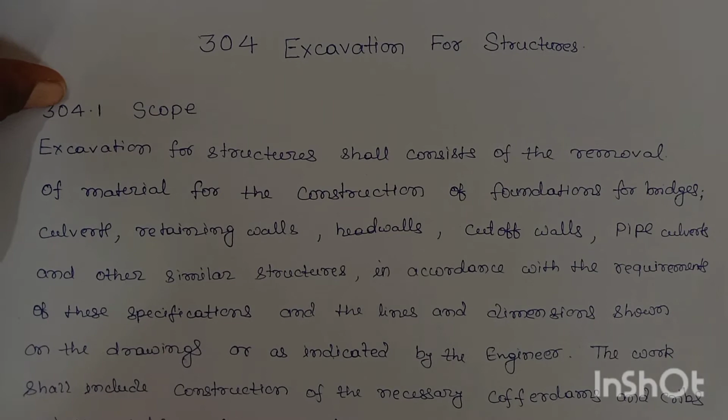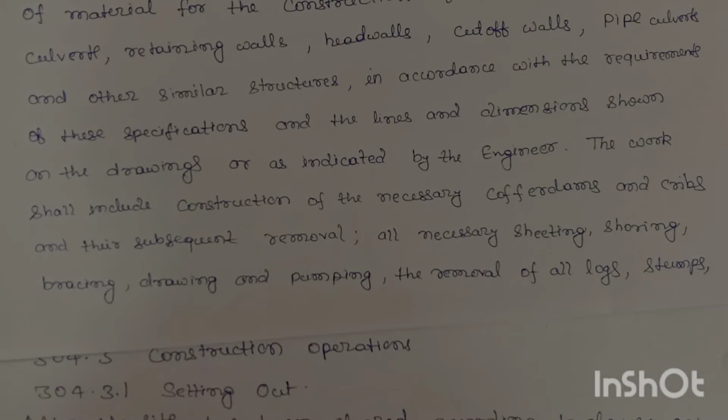The work shall include construction of the necessary cofferdams and cribs and the subsequent removal, all necessary sheeting, shoring, bracing, draining and pumping, the removal of all logs, stumps, grubs and other deleterious matters and obstructions necessary for placing the foundation, trimming bottom of excavation, backfilling and clearing up the site and the disposal of all surplus materials.

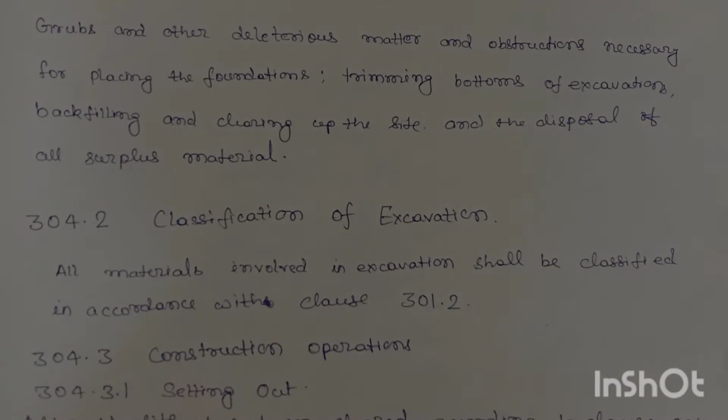304.2 Classification of excavation. All materials involved in excavation shall be classified in accordance with Clause 301.2.

304.3 Construction Operation. 304.3.1 Setting out.

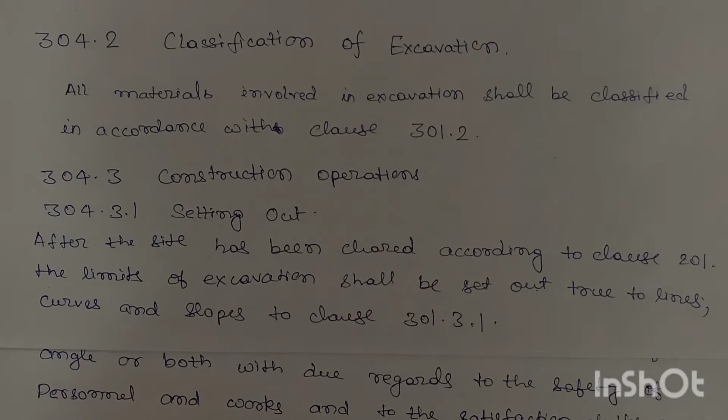After the site has been cleared according to Clause 201, that is clearing and grubbing, the limits of excavation shall be set out true to lines, curves and slopes according to Clause 301.3.1.

304.3.2 Excavation. Excavation shall be taken to the width of the lowest step of the footing, including additional width as required for construction operation. The sides shall be left plumb where the nature of soil allows it; where the nature of soil or the depth of the trench and season of the year do not permit vertical sides,

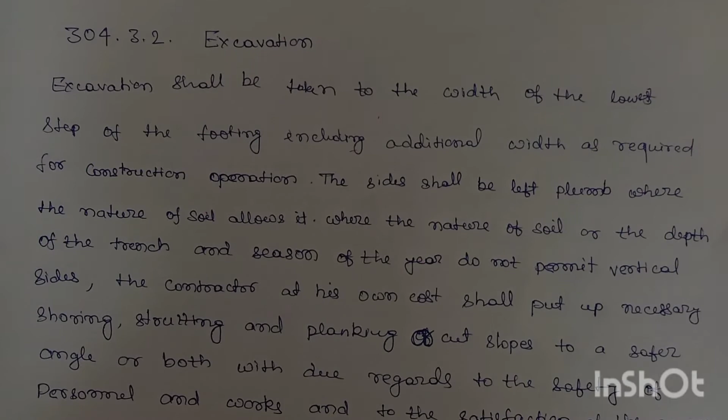the contractor at his own cost shall put up necessary shoring, strutting and planking, or cut slopes to safer angles, or both, with due regard to the safety of personnel and work and to the satisfaction of the engineer.

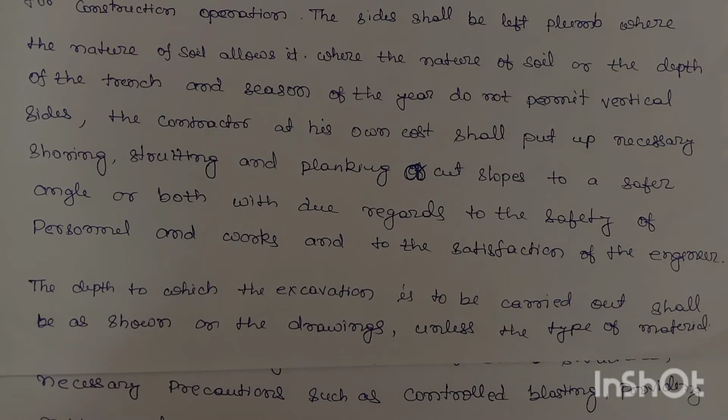The depth to which the excavation is to be carried out shall be as shown on the drawing unless the type of material encountered is such as to necessitate changes, in which case the depth shall be as ordered by the engineer.

Propping shall be undertaken when any foundation or stressed zone from an adjoining structure is within a line of 1 vertical to 2 horizontal from the bottom of the excavation.

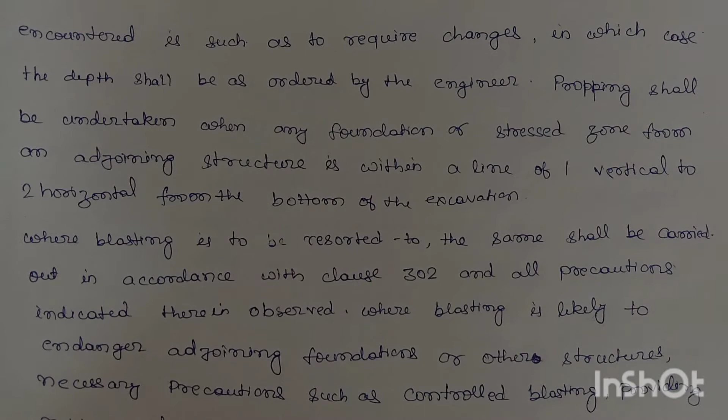Where blasting is to be resorted to, the same shall be carried out in accordance with Clause 302, and all precautions indicated therein observed. Where blasting is likely to endanger adjoining foundations or other structures, necessary precautions such as controlled blasting, providing rubber mat cover to prevent flying of debris, etc. shall be taken to prevent any damage.

304.3.3 Dewatering and protection. Normally, open foundations shall be laid dry where water is met with in excavation due to stream flow, seepage, springs, rain, or other reasons.

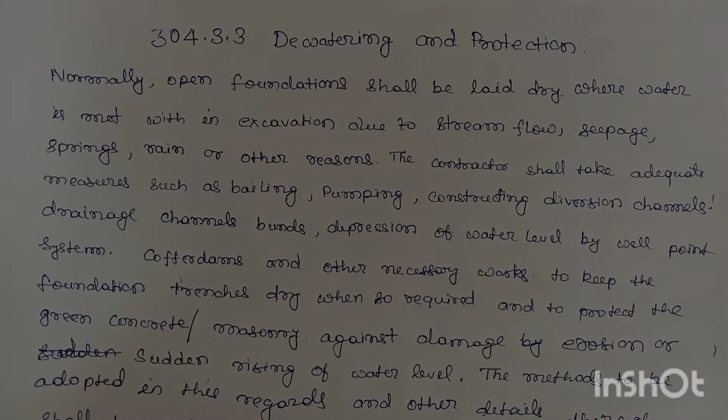The contractor shall take adequate measures such as bailing, pumping, constructing diversion channels, drainage channels, bunds, depression of water level by well point system, cofferdams, and other necessary works to keep the foundation trenches dry when so required and to protect the green concrete masonry from damage by erosion or sudden rising of water level.

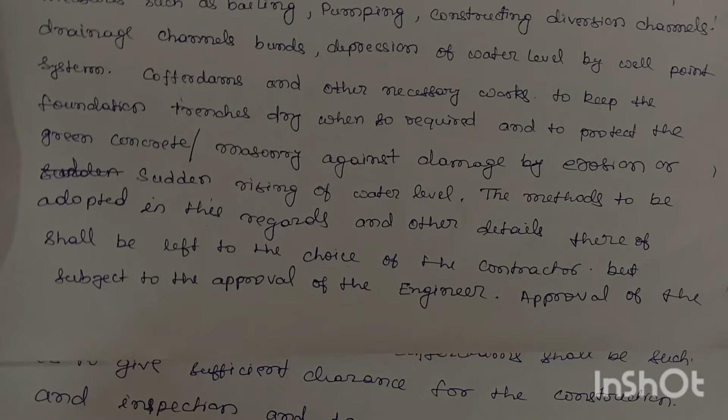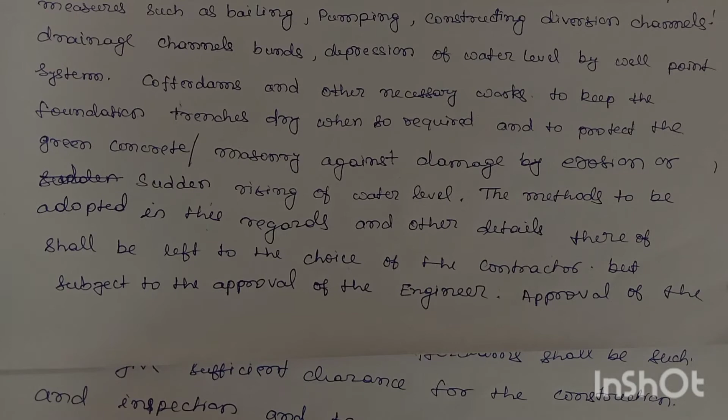The method to be adopted in these regards and other details thereof shall be left to the choice of the contractor, but subject to the approval of the engineer. Approval of the engineer shall however not relieve the contractor of the responsibility for the adequacy of the dewatering and protection arrangements for the quality and safety of the works.

Where cofferdams are required, these shall be carried to adequate depth and heights, be safely designed and constructed, and be made as watertight as is necessary for facilitating construction to be carried out inside them.

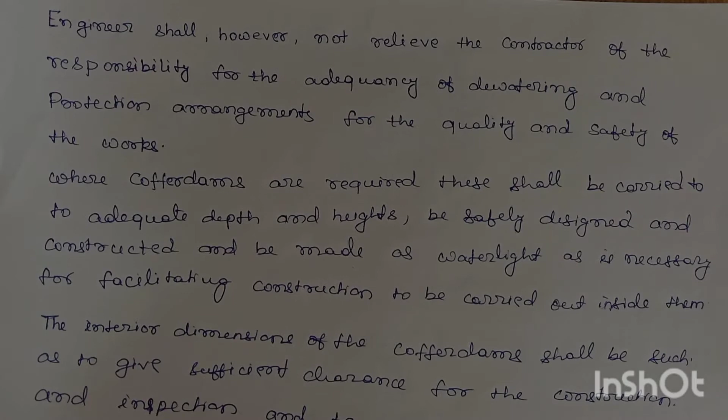The interior dimensions of the cofferdam shall be such as to give sufficient clearance for the construction and inspection and to permit installation of pumping equipment etc. inside the enclosed area.

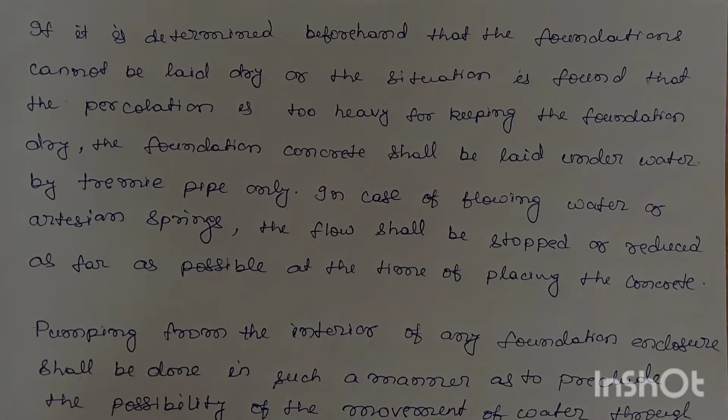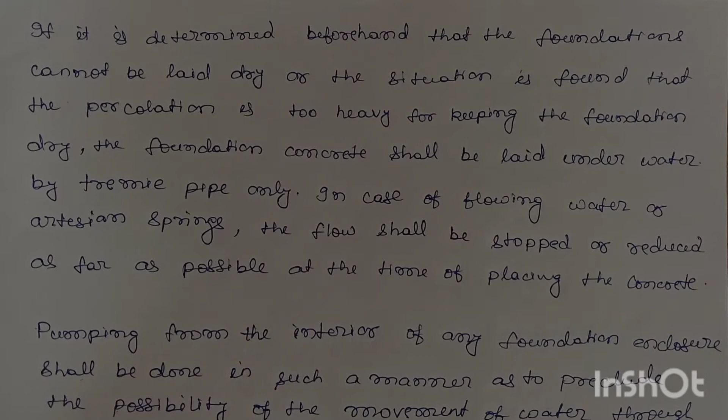It is determined beforehand that the foundations cannot be laid dry, or the situation is found that the percolation is too heavy for keeping the foundation dry. The foundation concrete shall be laid under water by tremie pipes only. In case of flowing water or artesian springs, the flow shall be stopped or reduced as far as possible at the time of placing the concrete.

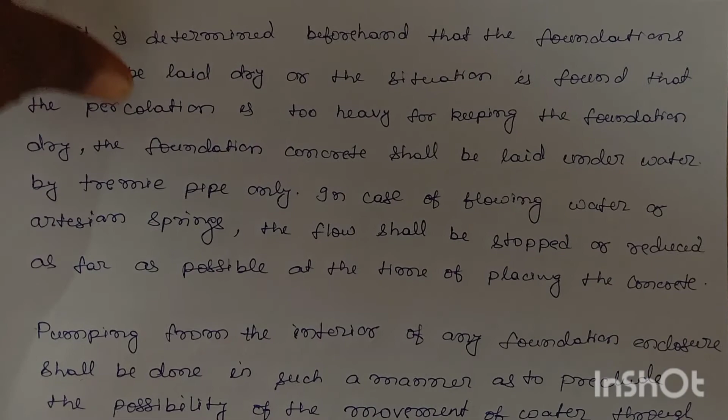Pumping from the interior of any foundation enclosure shall be done in such a manner as to preclude the possibility of the movement of water through any fresh concrete.

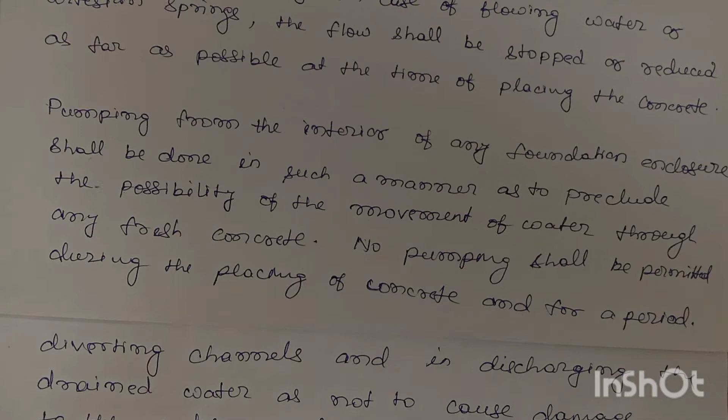No pumping shall be permitted during the placing of concrete and for a period of at least 24 hours thereafter, unless it is done from a suitable sump separated from the concrete work by a water-tight wall or other similar means.

At the discretion of the contractor, cement grouting or other approved methods may be used to prevent or reduce seepage and to protect the excavation area.

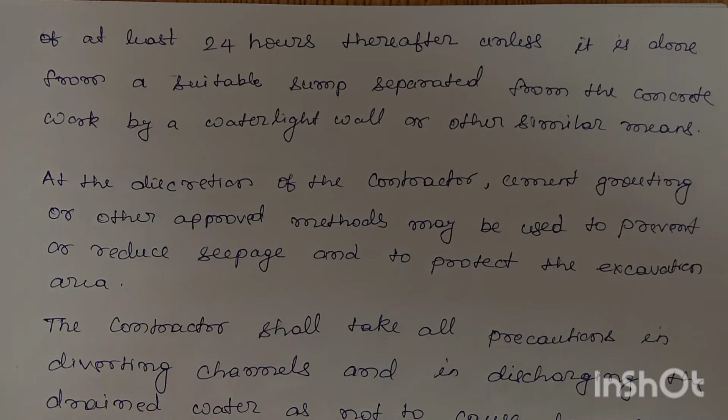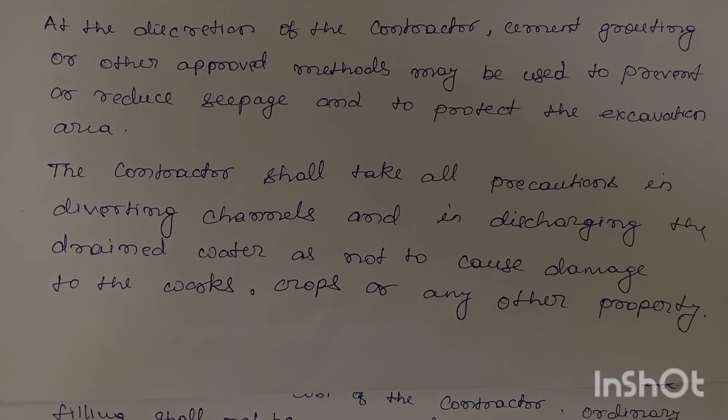The contractor shall take all precaution in diverting channels and in discharging the drained water so as not to cause damage to the works, crops or any other property.

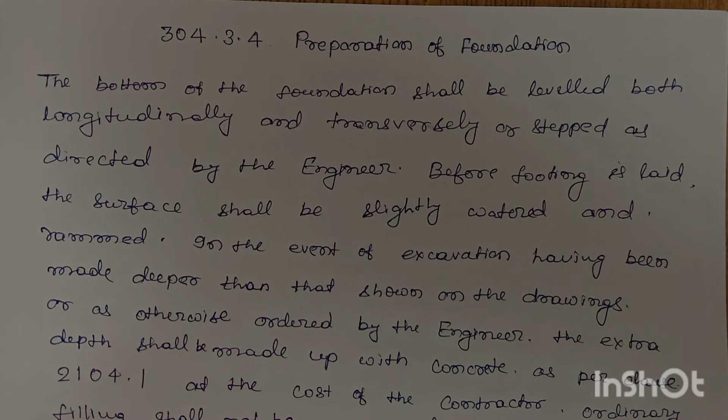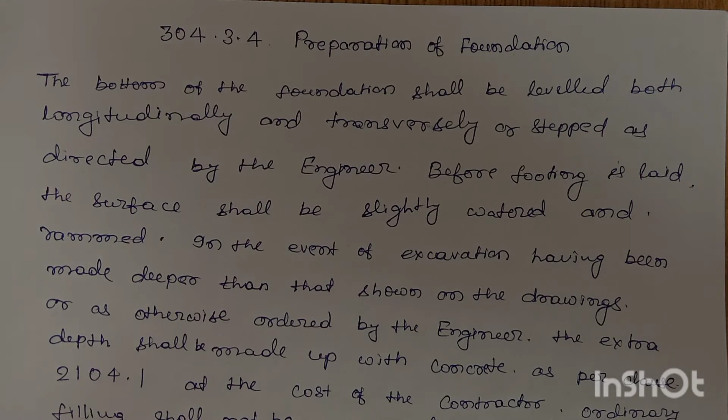Preparation of foundation. The bottom of the foundation shall be leveled both longitudinally and transversely or stepped as directed by the engineer. Before footing is laid, the surface shall be slightly watered and rammed, in the event of excavation having been made deeper than that shown on the drawing or as otherwise ordered by the engineer.

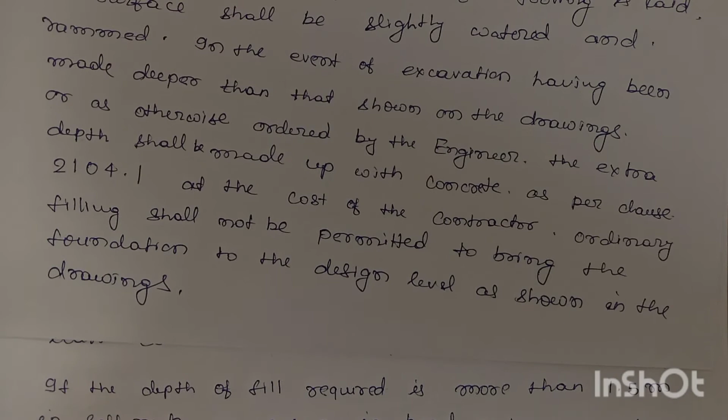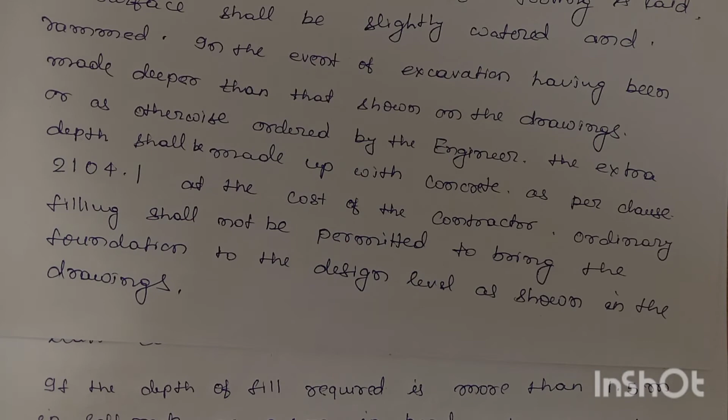The extra depth shall be made up with concrete as per clause 2104.1, at the cost of the contractor. Ordinary filling shall not be permitted to bring the foundation to the design level as shown in the drawings.

When rock or other hard strata is encountered, it shall be freed of all soft and loose material, cleared and cut to a firm surface, either level or stepped, as directed by the engineer. All seams shall be cleared and cut, filled with cement mortar or grout to the satisfaction of the engineer.

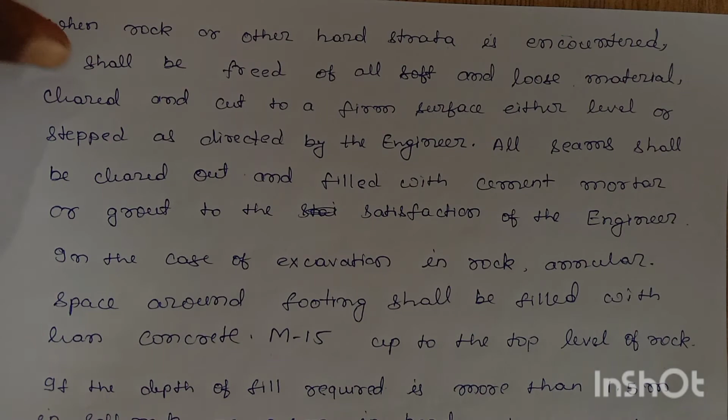In the case of excavation in rock, annular space around footing shall be filled with lean concrete M15 up to the top level of rock, if the depth of fill required is more than 1.5 meter in soft rock or 0.6 meter in hard rock above the foundation level.

The filling up to this level shall be done with M15 concrete, and the portion above shall be filled up by concrete or by boulder grouting with cement.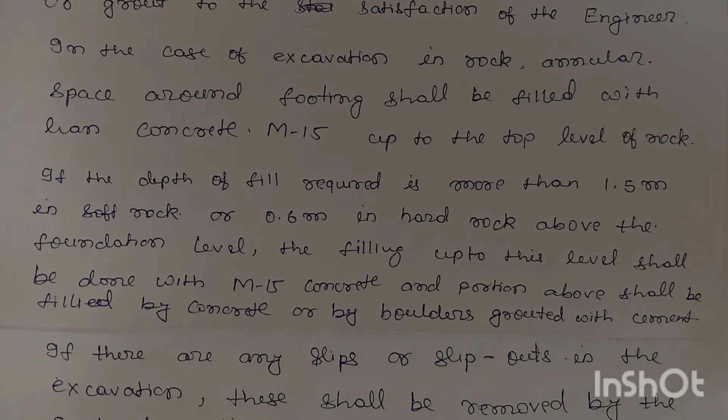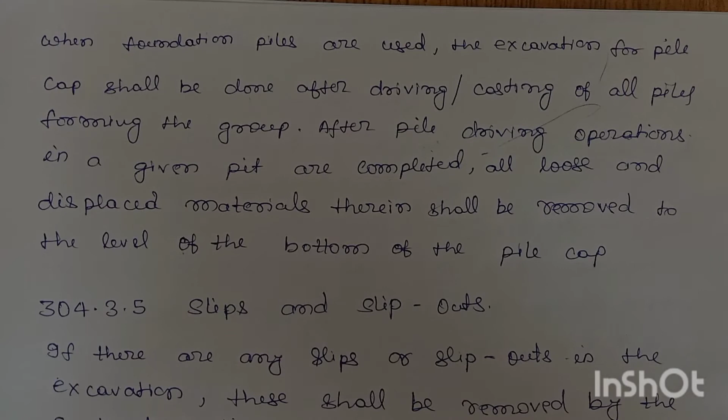When foundation piles are used, the excavation for pile caps shall be done after driving and casting of all piles forming the group. After pile driving operation in a given pit are completed, all loose and displaced material therein shall be removed to the levels of the bottom of the pile cap.

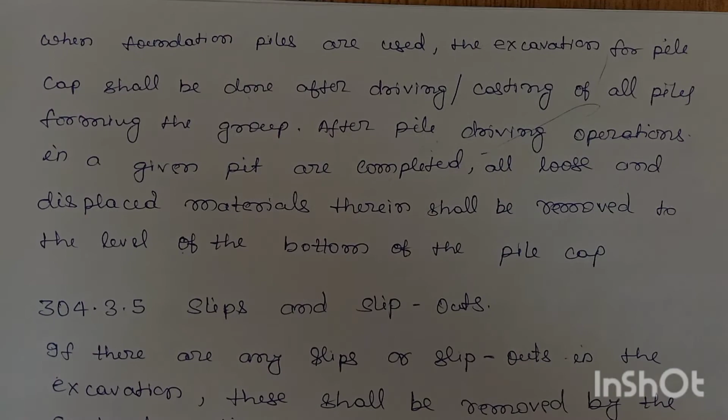304.3.5 Slips and slip outs. If there are any slips or slip outs in the excavation, these shall be removed by the contractor at his own cost.

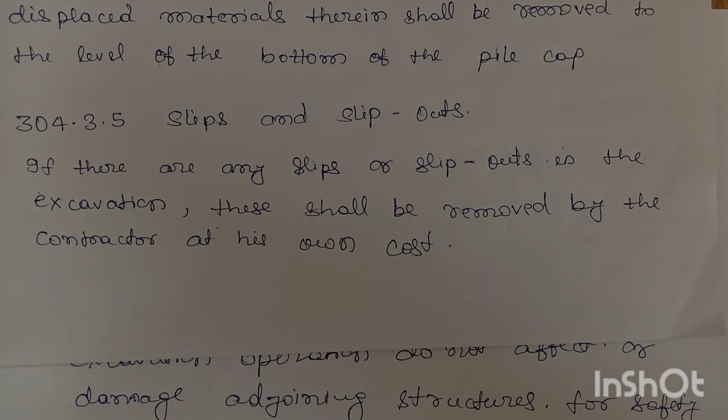304.3.6 Public safety. Near towns, villages and all frequented places, trenches and foundation pits shall be securely fenced, provided with a proper caution sign, and marked with red lights at night to avoid accidents.

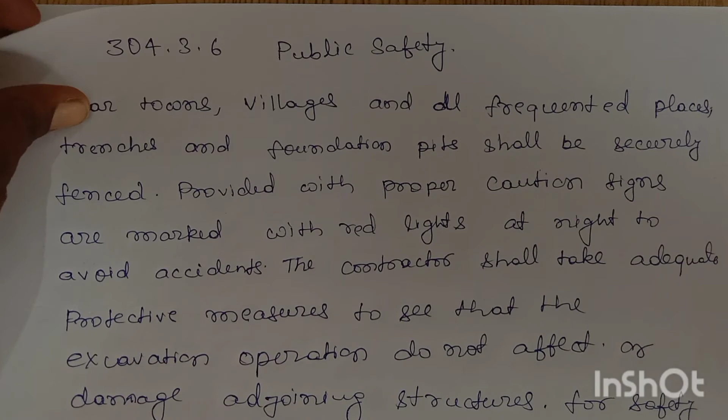The contractor shall take adequate protective measures to see that the excavation operation does not affect or damage adjoining structures. For safety precautions, guidelines may be taken from IS 3764.

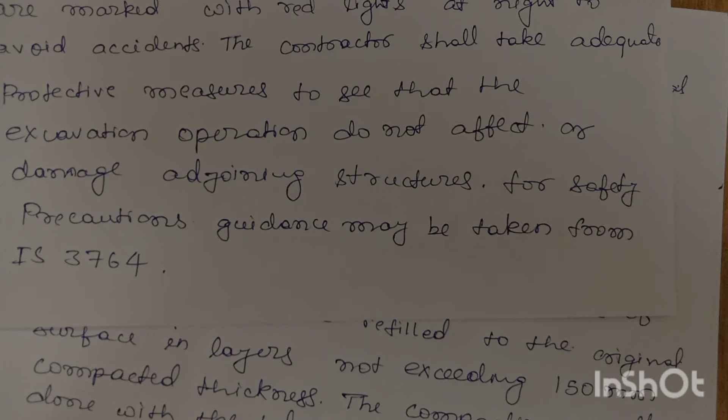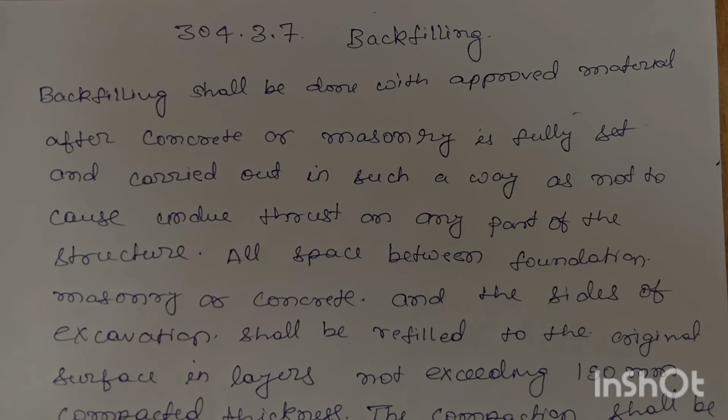304.3.7 Backfilling. Backfilling shall be done with approved material after concrete or masonry is fully set, and carried out in such a way as not to cause undue thrust on any parts of the structure. All spaces between foundation, masonry or concrete and the sides of excavation shall be refilled to the original surface in layers not exceeding 150 mm compacted thickness.

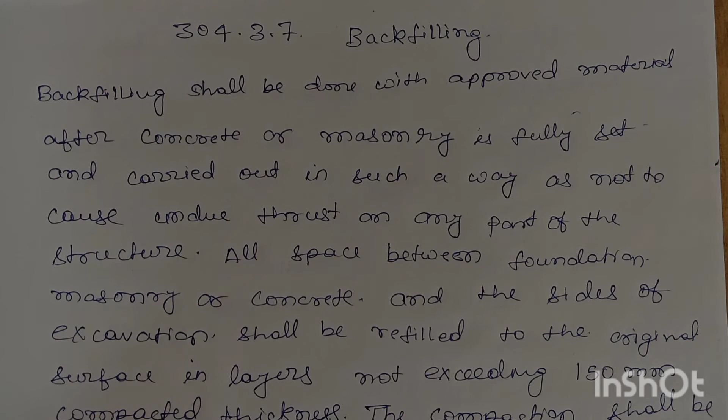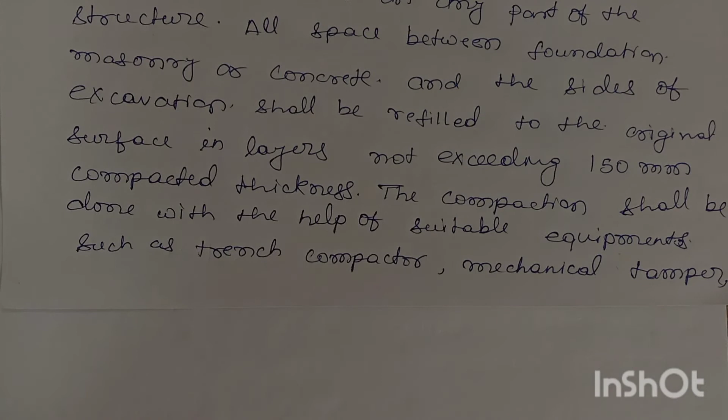The compaction shall be done with the help of suitable equipment such as trench compactor, mechanical tamper, rammer, plate vibrator, etc., after necessary watering, so as to achieve the maximum dry density.

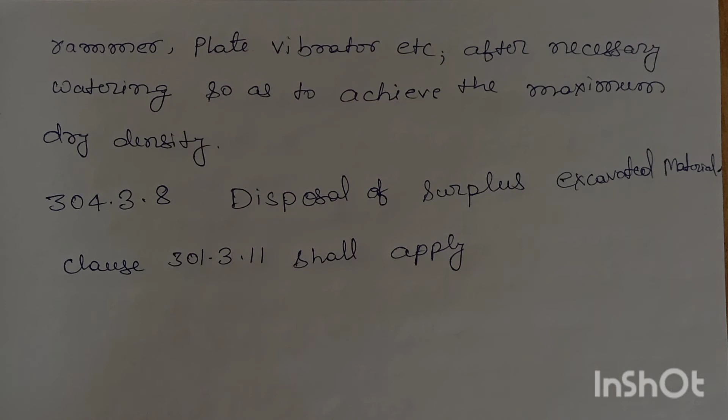304.3.8 Disposal of surplus excavated material. As per clause 301.3.11 shall apply.

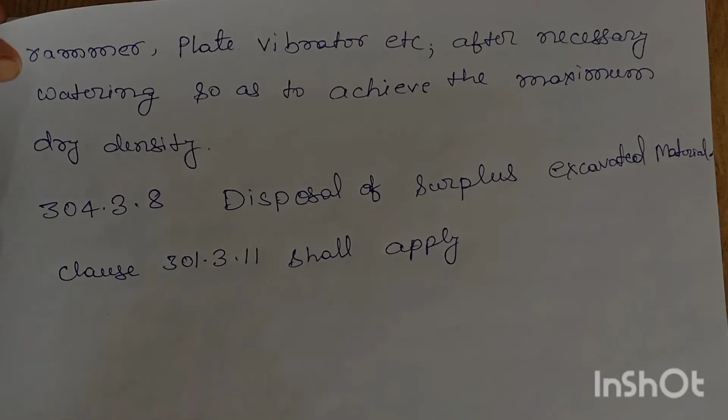304.4 Measurement for payments. Excavation for structure shall be measured in cubic meters for each class of material encountered, limited to the dimension shown on the drawing or as directed by the engineer.

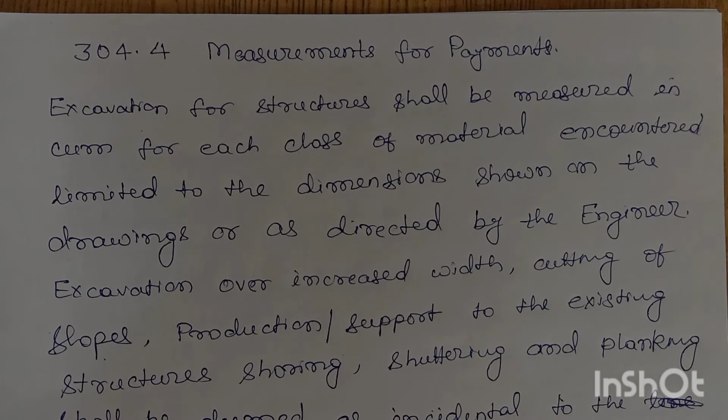Excavation over increased width, cutting of slopes, provision of supports to the existing structure, shoring, shuttering and planking shall be deemed incidental to the main work and shall not be measured and paid separately.

Preparation of rock foundation shall be measured in square meters.

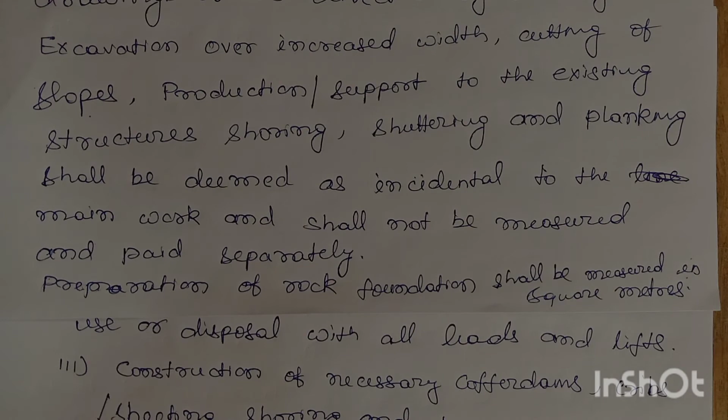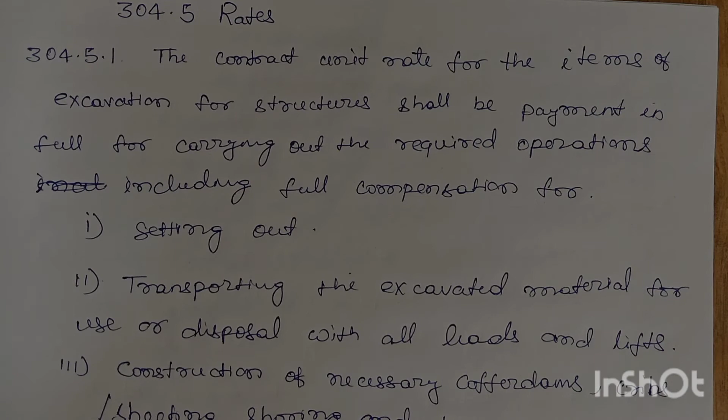304.5 Rates. 304.5.1 The contract unit rate for the items of excavation for a structure shall be payment in full for carrying out the required operation, including full compensation for setting out, transporting the excavated material for use or disposal with all leads and lifts.

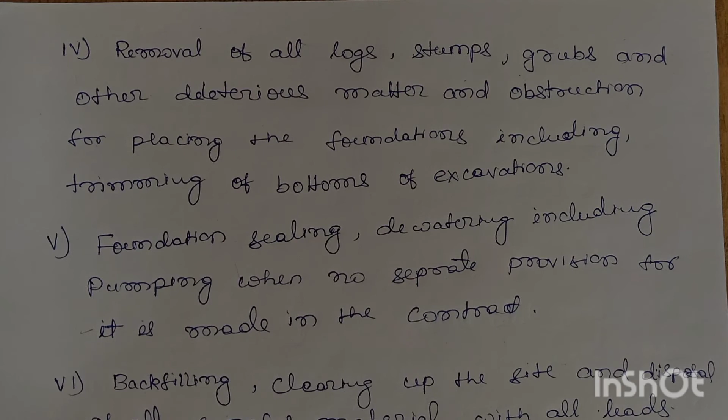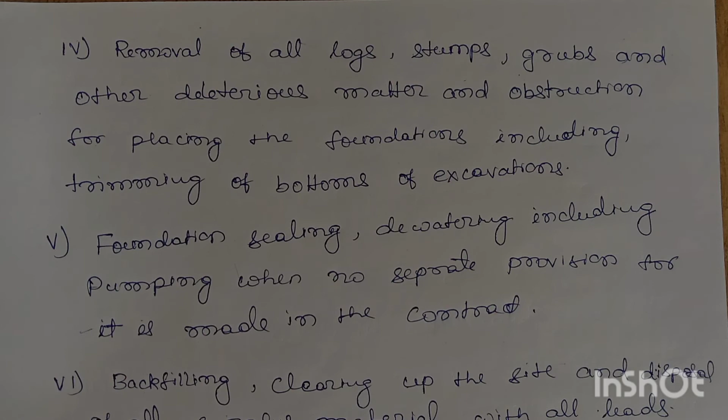Construction of necessary coffer dams, cribs, sheeting, shoring and bracing and their subsequent removal. Removal of all logs, stumps, grubs and other deleterious material and obstructions for placing the foundation, including trimming of bottom of excavation, foundation sealing, dewatering including pumping when no separate provision for it is made in the contract.

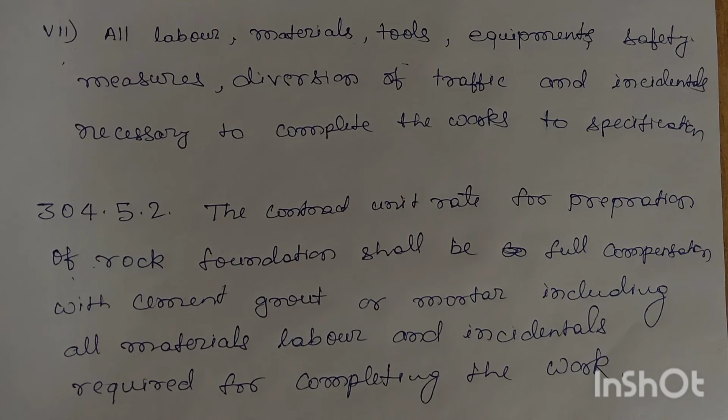Backfilling, clearing up the site and disposal of all surplus material with all leads and lifts or as otherwise specified. All labor, material, tools, equipment, safety measures, diversion of traffic and incidentals necessary to complete the works to specification.

304.5.2 The contract unit rate for preparation of rock foundation shall be full compensation with cement, grout or mortar, including all materials, labor and incidentals required for completing the work.

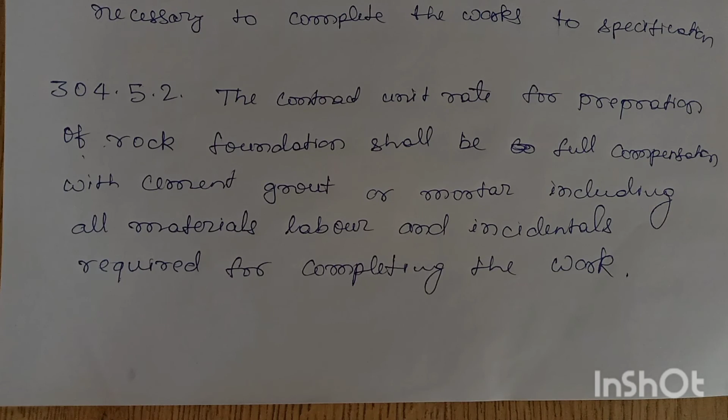In this way we finished 304 section, excavation for structure. Thank you.